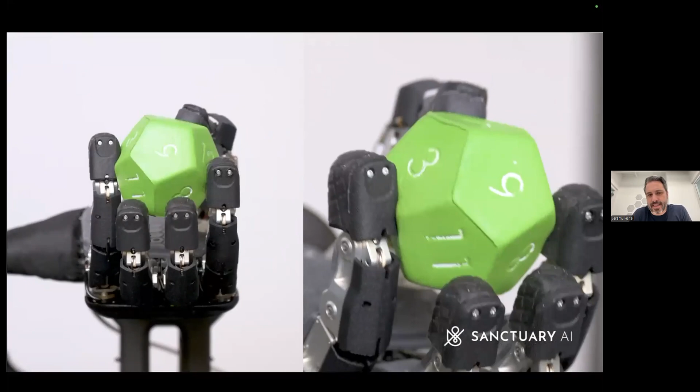We can. Okay, so at Sanctuary, we've been continuing a lot of that thread, driving durable tactile sensors and really studying the relationship between system capabilities and how those systems perform, advancing dexterity in those directions. So I have a few videos to share. This is our hand, our third generation hand. Very anthropomorphic design, very human-like kinematics, and it has the right kind of power density that's similar to the human hand.

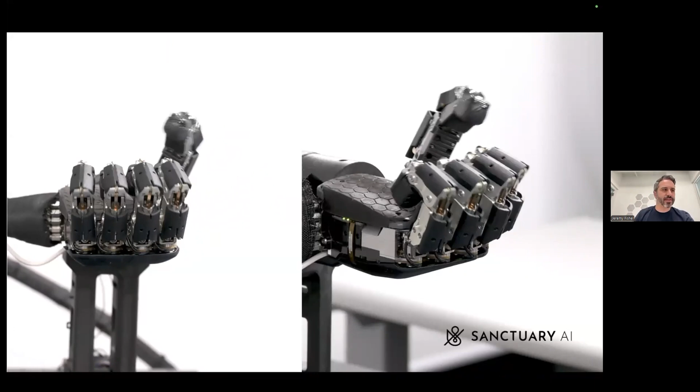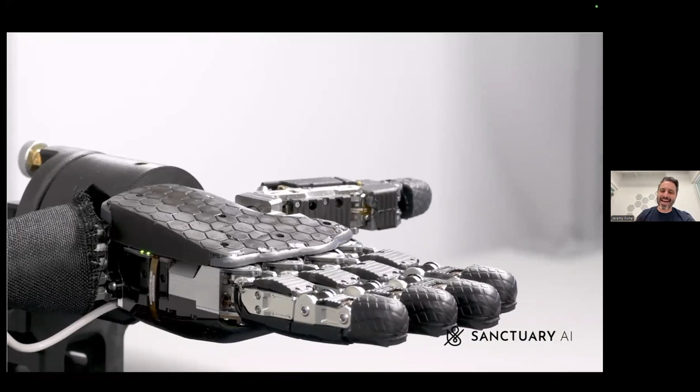Very important for in-hand manipulation, as we're demonstrating here, that some of our engineers have worked on. It can do a lot of things the human hand can do. This has been a critical tool for us to study this relationship between which of these features, degrees of freedom, speeds, and strength actually relate to performing tasks that humans do with their hands. That's really a big philosophy of our company: we want to be able to do the kinds of work people can do with their hands. So lots of great stuff we can share about that.

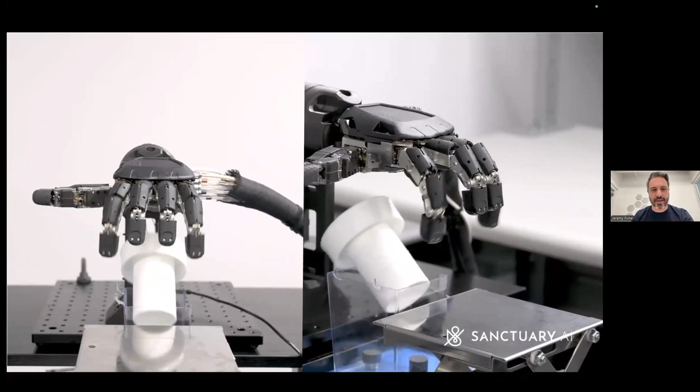One of the ones I actually think is very exciting work we've done lately, and I'm glad I get to talk over this video, is this one we've demonstrated with this in-hand manipulation type task. We train this in simulation, and we're doing this rotation.

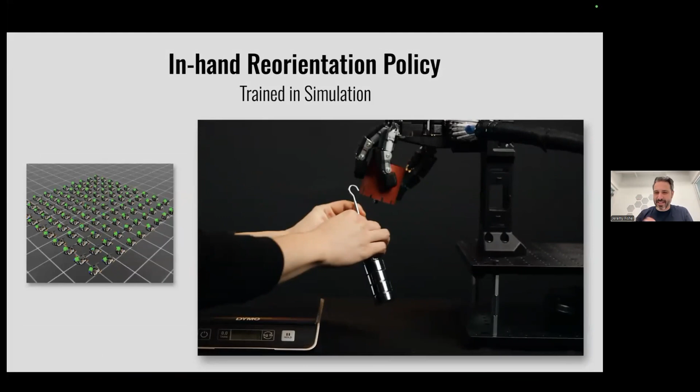We do this with actually 500 grams of weight. It doesn't sound like a lot. I remember seeing this the first time and saying, well, that's just 500 grams, that's not too difficult. But if you have access to weights, I'd encourage you to pick up a 500-gram weight and try to do this task. It's actually incredibly difficult, and I'm really proud of this performance. I can barely do it with 1 kilogram of weight, and at 2 kilograms it's virtually impossible.

So we're really focusing on not only how can we be dexterous, but how do we have the power of the human hand. We'll talk more about that later, but there's really a ton of conflicts in having many degrees of freedom and delicate manipulation and the power, which is something the human hand does an amazing job of.

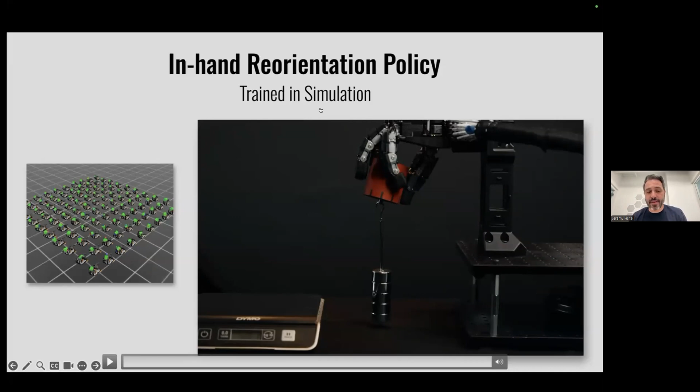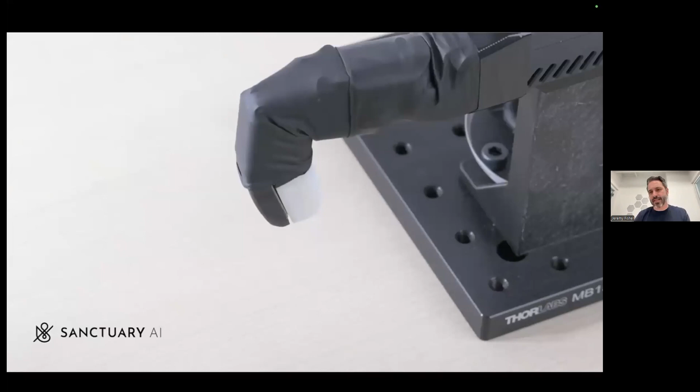Another thing, given my background, that we've focused on a lot is tactile sensing. I made the BioTac at Syntouch, which is a very biomimetic sensor. Most of the group's probably seen the green fingertip on various robot systems. While that system is very capable and can sense the force, vibrations, and temperatures that human skin can detect, it wasn't very durable. Recognizing there's been a number of amazing sensors developed, but they haven't been commercialized or industrialized in any significant capacity, we've really focused on the durability and compliance of these systems while still maintaining that delicacy.

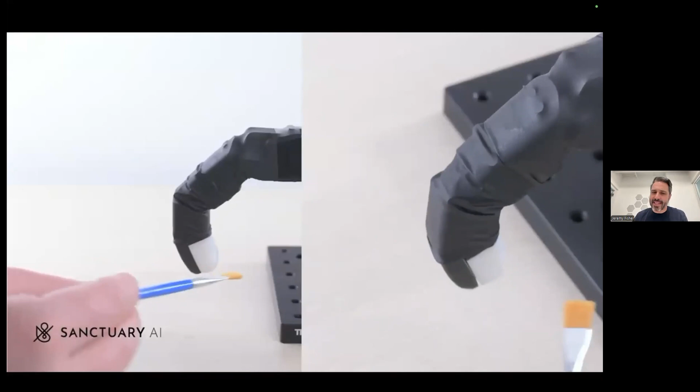So you can see we're able to delicately touch a domino, not knock it over. Another task that's very difficult to do - if you close your eyes and try to touch a domino and not knock it over. We have that sensitivity that allows responsiveness too. This is one of our prototype fingers that's going to come out in a future generation hand.

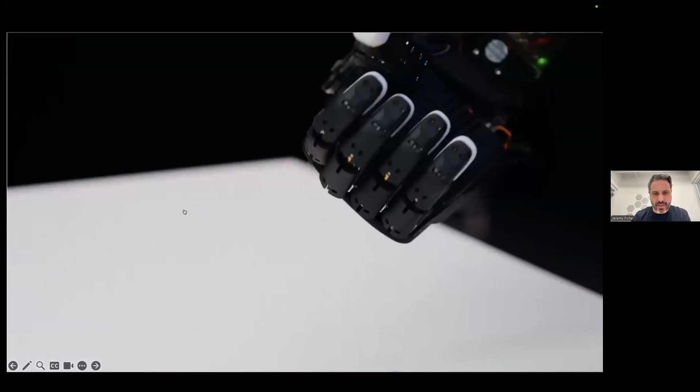We've got lots of great videos on touch. Let me kind of let some stuff play in the background. As I mentioned earlier, our focus really has been on this durability, the compliance, and the sensitivity.

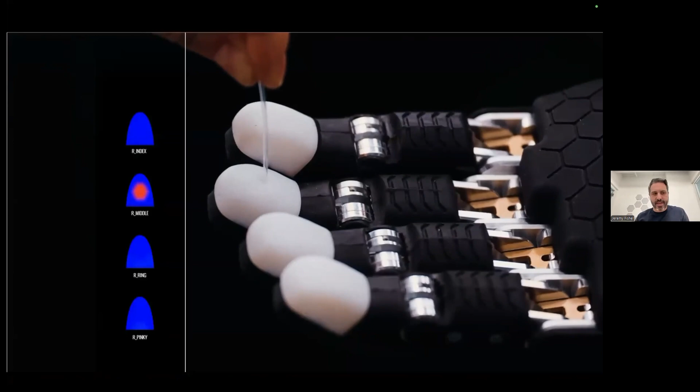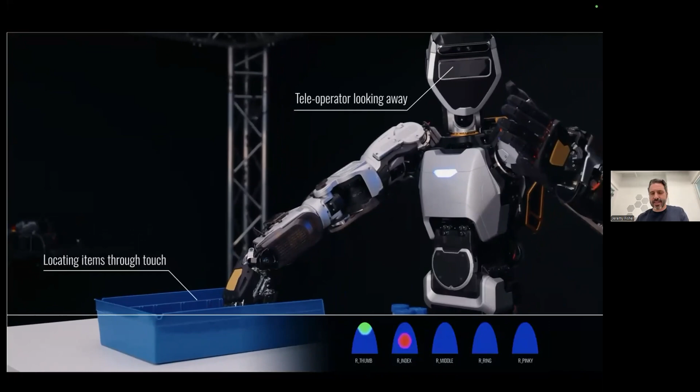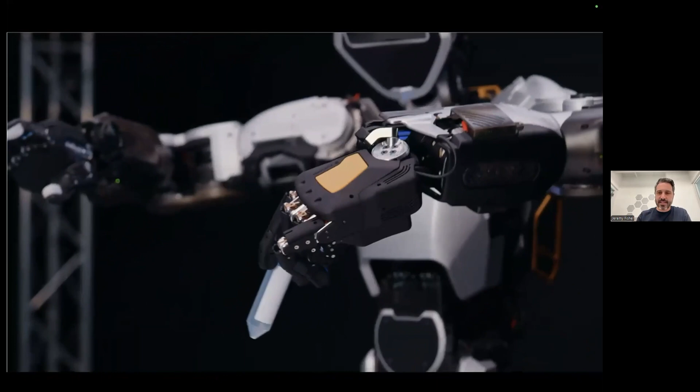Touch is a very, very critical sense for being able to react to what we're interacting with. I've always thought of vision as a planning sense - you see everything in your environment and decide what you want to do with it - but touch is for adapting to those uncertainties. Is the object slipping? Do I need to change my grip? Can I confirm my grip and move on to the next thing? Or how is in-hand manipulation proceeding? So really what we're seeing is touch is very critical for speeding things up. If you don't have this tactile sense, you make a plan, and if something goes wrong, you have to stop and make a new plan. Whereas with a sense of touch, you could react and adapt on the fly the way people do.

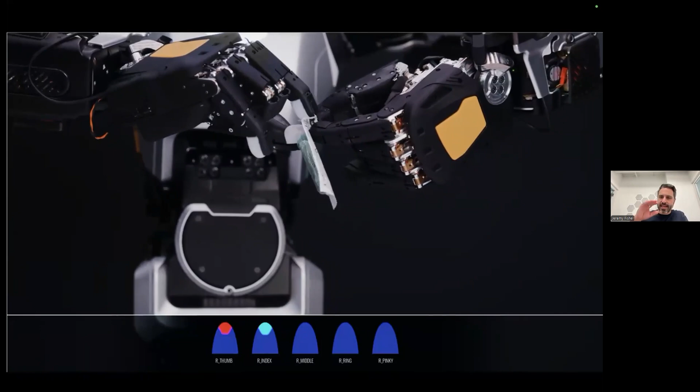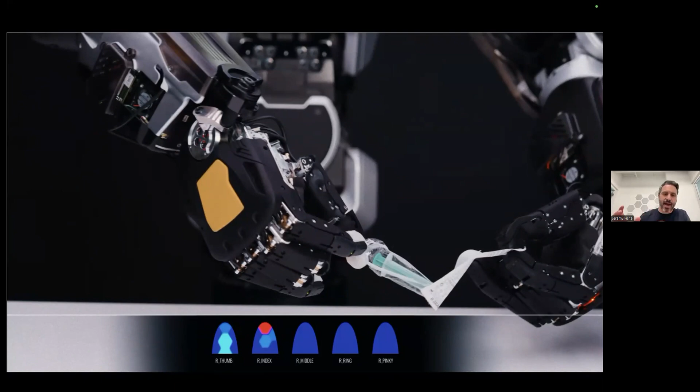Really our focus at Sanctuary is there's this tremendous range we see in human hands, between being delicate and able to do small things, to powerful - like the high grasp force we can attain with our hand. Getting that in one package is an incredibly difficult challenge. That's been our focus: we want to have the delicate tactile sensing, react to small events, yet have a lot of power behind it too. We'll talk more about that, but we've got our hydraulic actuation that gives our high degree of freedom hands the power that gets much closer to human hands while maintaining that delicacy.

And this is my favorite video. We've been putting tactile sensors on robots and doing teleoperation for almost 6 years now, and we're always seeing this immersive connection with touch. This is a reaction from one of our engineers flying the robot - the first time we put the sensors on the robot. She's experiencing them for the first time. I hope the audio plays.

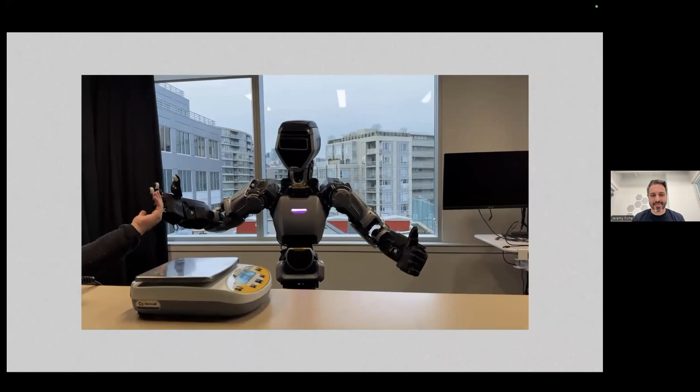Oh, I have touch sensors. Yeah, are they working right now? I can't tell. Oh, yes, they are.

That's crazy. And we see these reactions all the time. It gives this sense of connection. It makes these robots more intuitive to control and manipulate objects, and it's such a critical sense. We're really excited to be working with a company that shares our vision here - we need touch, we need power, we need these kinematics to replicate all these amazing things our hands can do.

Thank you, Jeremy. Really fascinating work.

Alberto, Boston Dynamics is well known for its videos of tremendously agile and gymnastic robots, but people are perhaps less familiar with its work on manipulation. Could you bring our audience up to speed on what manipulation work you and your team are doing for the Atlas project?

Oh yeah, happy to do it. Thanks for the invitation. It's great to be here, and I have to say, just personally, it's also great to be talking with a different banner on my bag, Boston Dynamics. It's been a nice transition from the work that I was doing a couple of years ago. So let me load up my slides.

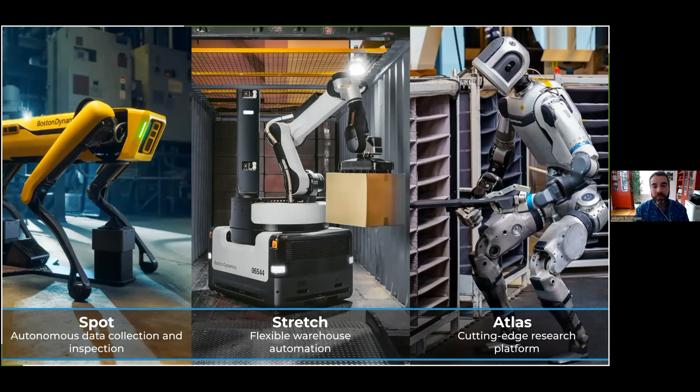All right, just a quick one-slide background of Boston Dynamics. There are basically 3 projects that dominate most of what Boston Dynamics does. Spot, which is a product that you can buy, mostly focused on autonomous data collection and asset inspection. You can think of Spot as a robot that walks around, let's say a factory, or other environments, recording what's happening and sending warning signals when something looks off.

Then Stretch is also a product you can buy, and it's a robot focused on case handling. Today, it's mostly focused on the deployments we're doing on truck unloading, but extending the range of types of workflows it can handle. And then there's Atlas, which is what I'm going to discuss more today, our frontier research project, looking in the past mostly at mobility, and for the last 2-3 years transitioning into mobile manipulation.

Before going into more detail on the type of research that Atlas is doing in dexterity, I just wanted to have one slide as to why dexterous manipulation matters, with one case example of mobile manipulation in manufacturing.

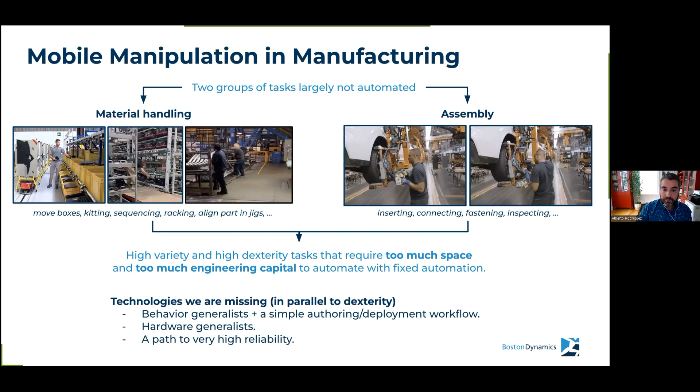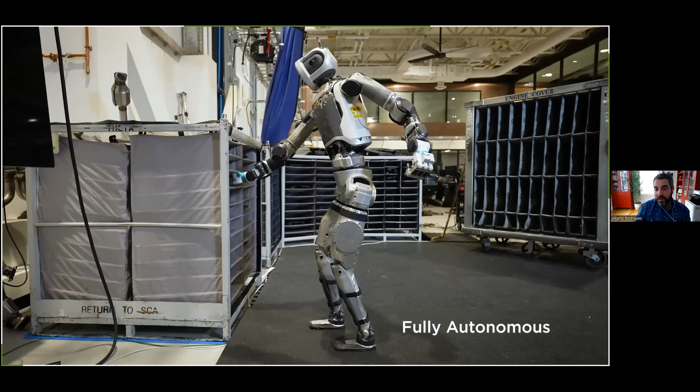So what is Boston Dynamics doing in this space? Here I just put a video which you might have seen on YouTube. This is Atlas executing one particular workflow for material handling. This is called sequencing. There are these input fixtures with different varieties of parts, this one being an engine cover, and this is a fixture where it's inserting it, where each slot gets associated with a car in the assembly line in order.

So this workflow is responsible for making sure that the order in which the parts are inserted in the output fixture that will be rolled into the assembly line is exactly the same as the cars that are going to be assembled in order.

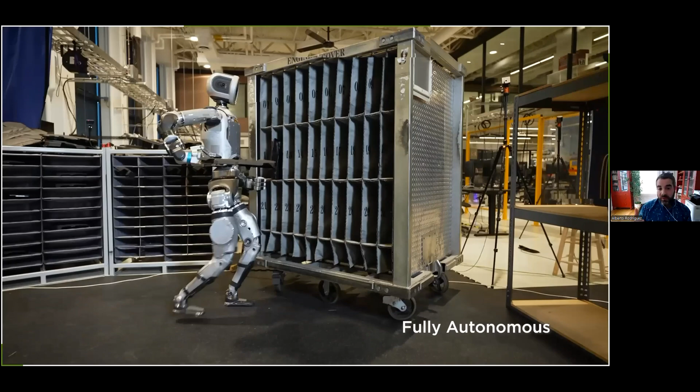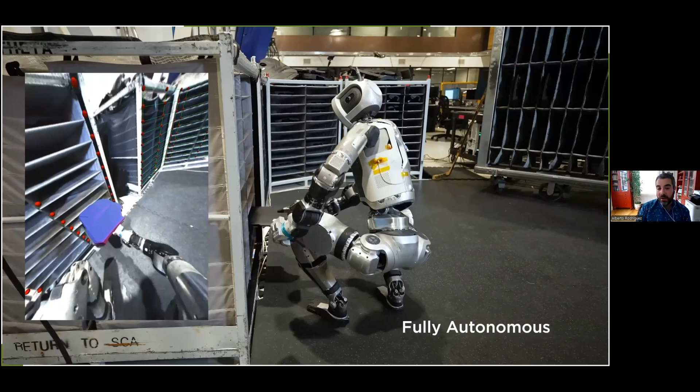So we've been building behavior architecture that is capable of executing tasks like this, pick and place behaviors with a certain degree of reliability. But really what I wanted to discuss today is where we're going next, where we think the next push is to increase the generality of the behaviors that Atlas can do, in particular in the space of dexterity.

For the most part, there are three main threads we're pushing on: simulation at scale for reinforcement learning, whole body teleoperation for imitation learning, and grippers with tactile sensing. I'll go into just one slide for each of these.

On the gripper side, to follow up from Jeremy's presentation, we've taken a slightly different approach. Instead of starting from a humanoid form factor, we've been interested in growing incrementally the degree of dexterity of the gripper as we recognize that we need more dexterity, while at the same time trying to maintain a certain degree of reliability and strength to support the kinds of tasks we want Atlas to do with high loads, heavy objects, and with high repetition, for example data collection at scale.

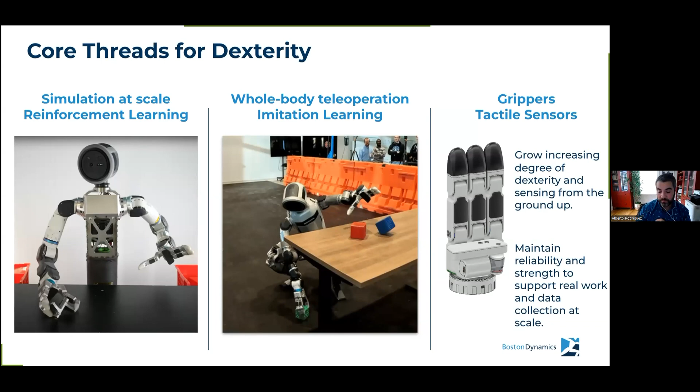Here's one slide on the work we're doing on reinforcement learning. This is a demonstration of a policy trained in simulation that shows a significant degree of generalization to grasping objects. None of these objects showing up in front of Atlas were part of training. It's been trained on hundreds of objects, but none of these were part of the training. It operates directly from RGB stereo, so there's no prior knowledge of the geometry, appearance, or mass of these objects. It all comes directly from either visual or proprioceptive feedback.

One of the things I am particularly excited about is that through training these policies at scale, we do see the beginning of emergence of continuous dynamic behaviors that do not separate between pre-grasp, grasp, and lift. Things like failure detection and retry are emerging when you push these at scale.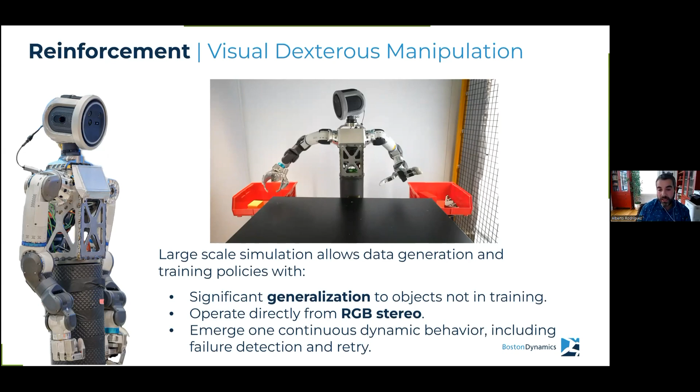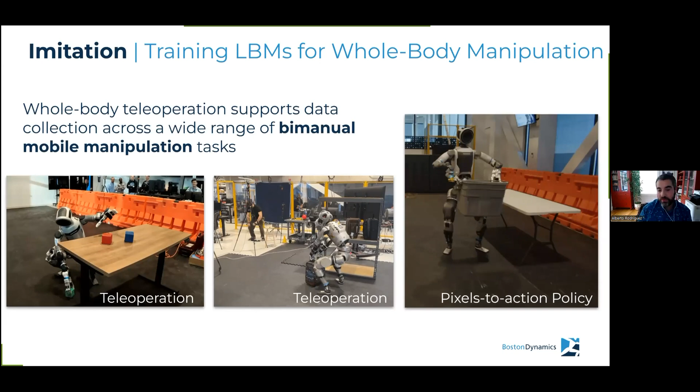So that's one core thread. The second, which we think is essential to make progress on dexterity, not just at the hand level but at the whole body level, is enabling whole body teleoperation that supports data collection across a wide range of bimanual mobile manipulation tasks, including things like crouching to pick up something from the ground, or lifting something heavy using both hands at the same time to do regrasps. Here I show two examples on the left of using a teleoperation system, and on the right an example of a policy trained from data collected from the teleoperation system.

All right, I think that's my last slide.

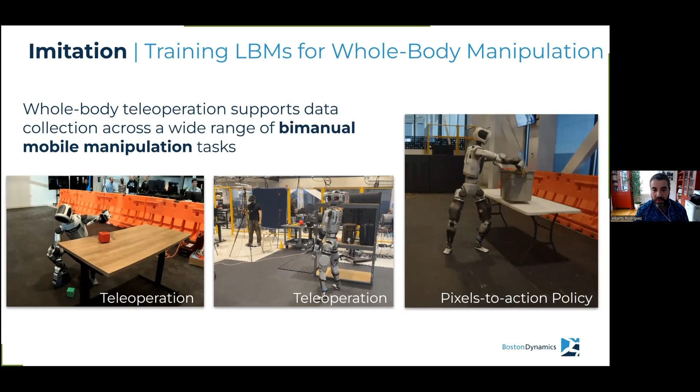Thank you, Alberto, for sharing that really exciting vision for the Atlas platform.

Luis, Apptronik has been in the news for its recent success in raising over $350 million, and more broadly there have been enormous investments in humanoids in recent years. We would love to hear more about your work within this space.

Thank you, Brenna. Thank you, Kevin. Pleasure to be here with esteemed colleagues. Indeed, Apptronik has been a story of success and good timing. I'm very pleased to be here with other colleagues who are equally, if not more, successful, all of us pushing this wonderful market forward.

So, if you don't mind, I'll share some slides. You might know me for having spent the last about 25 years in the area of whole body control of humanoid robots, both as an academic and as original co-founder of Apptronik, where now I am somewhere between business development, fundraiser, and innovation advisor.

The company started in 2016. It started selling components—that was our vision at the beginning, but clearly margins were low. About 4 or 5 years later, we decided that systems, in particular humanoids, as strange as it sounded at the time, was going to be our market.

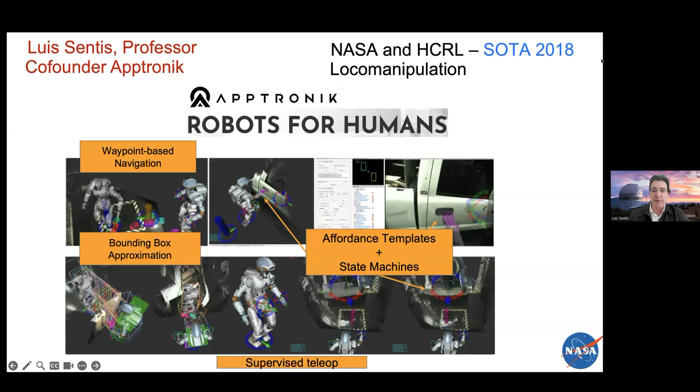What we see here is movies and renderings pre-COVID, about 2017, 2018. They are highly scripted, nonetheless pretty impressive, using affordances. There's not a whole lot of autonomy except maybe some of the walking, semi-autonomous. But that was already a feat.

One important thing to notice here is that out of 33 runs of this task, it was opening a door of a car, finding a bag and zipping it—no, it was not unzipping it, it was putting it in a containment vessel in case they had a bomb, and so on and so forth. We had 33 runs, about 30 minutes each, and we were successful in about 57% of them, which is fairly low.

The rest of them were failures due to falling and unrecoverable walking situations. You can get into state estimation drift and so on. So failure rates, again in 2017, 2018, were high. I'm going to argue that they're still high today.

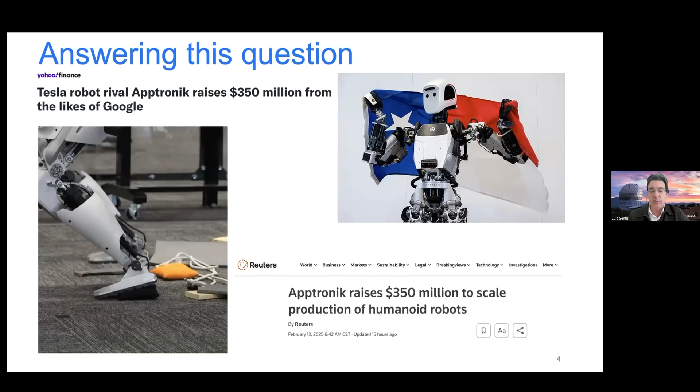Companies like Apptronik and others are here to respond to these issues and turn this into a product, meaning we can operate with way more reliability. A lot of the product and engineering is put now on testing, verifying, deploying, robustifying the algorithms of all sorts, whether it's machine learning algorithms or optimization-based algorithms. I believe that's going to make things much more successful.

Why is there excitement? Although they have limited manipulation capabilities, even tote manipulation—totes are the kind of things you see here on the right, bottom right side—those are huge. Box manipulation is huge. We see a lot of successful unicorn companies, not only on the humanoid side, but also on the industrial arm side, companies like Contoro, Dexterity, Covariant, and so on.

Where manipulation really takes real shape is seeing the demographics, and seeing that we're going to have about 1 billion people age 80 plus with mobility problems. That makes home really, really appealing, and at home is where we see multi-finger manipulation really thriving.

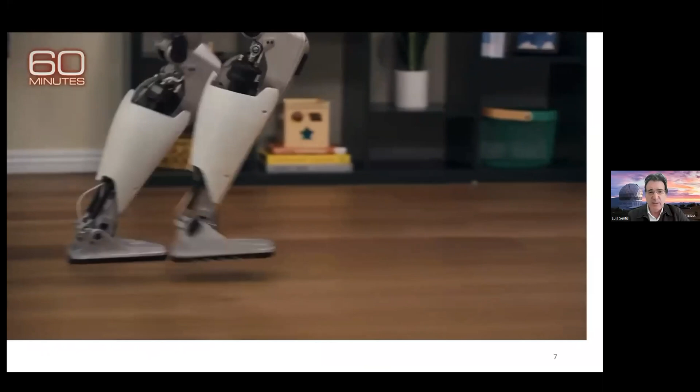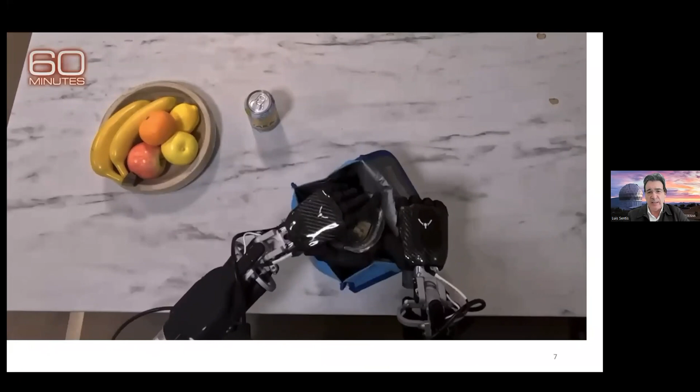This is a recent video on 60 Minutes with Demis Hassabis and our partnership with Google DeepMind. You can see that focus and that idea of achieving multi-finger manipulation as a frontier in humanoid robotics.

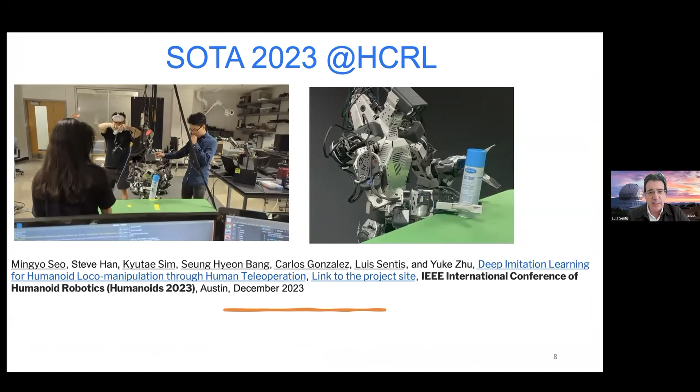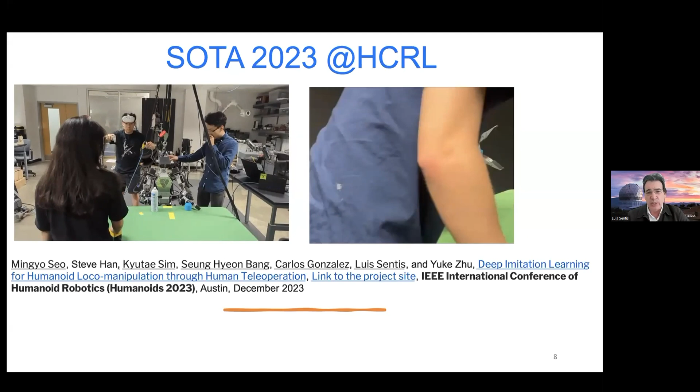Going through the time history, and I'm now switching a bit more to my academic role—this is research we conducted with Yuke Zhu, who's now leading the GR00T project at NVIDIA, using supervised learning, imitation learning, with any sort of interfaces, and being able to achieve pretty successful multi-arm, dual-arm manipulation, long horizon or mid-horizon kind of tasks.

That was achieved by a combination of approaches—often supervised learning or reinforcement learning is criticized for the lack of generality. They have robustness, but not generality.

In this case, we create abstractions. They are not necessarily aware of the entire embodiment. So we have on the left side a supervised learning approach, and on the right side a more classical optimization, whole body control approach. By combining both of them, we achieve robustness and cross-embodiment learning.

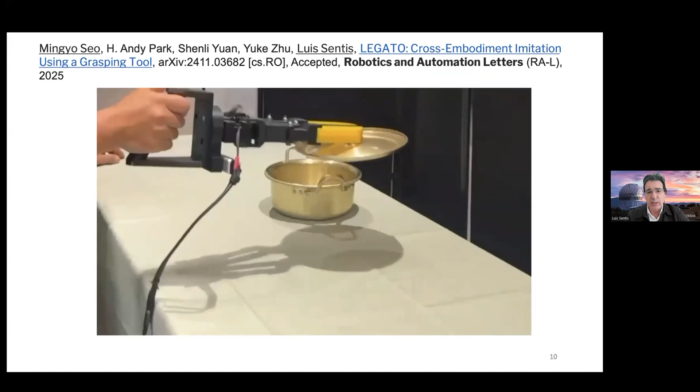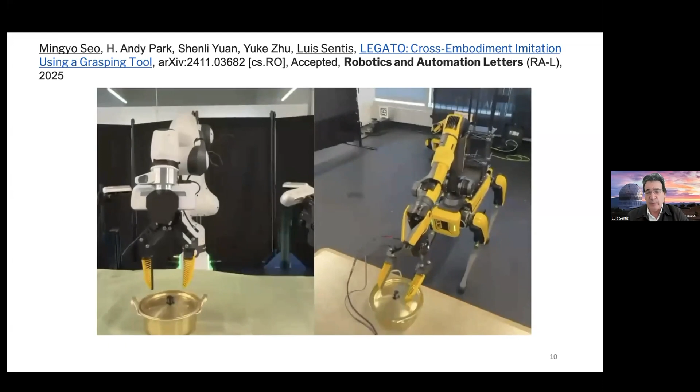Here is our extension using some simple tools that are becoming more popular—3D printing, low cost. We actually open sourced it. There was a collaboration with the Boston Dynamics AI Institute, and we gathered data sets in a representation space that can be translated to different embodiments. So you take out the parallel gripper, and with a few demonstrations, you've passed on the skill to other robotic systems.

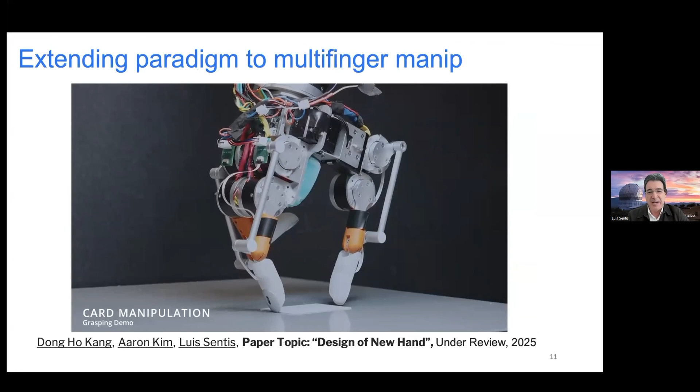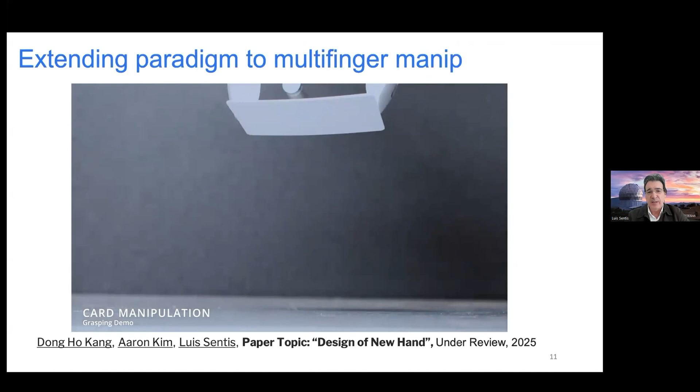This is our latest work with clients I cannot mention, exploring fingernails. We have a high belief that fingernails are going to play an important role in tasks like cooking, managing office work, processing things that are a bit more exotic. We're really excited about the combination of soft and hard surfaces for manipulation. You will see more of that fairly soon.

That allows us to cover more of the grasping taxonomy and the fine precision in manipulation of other types of objects. So we're making a case here for multi-fingers.

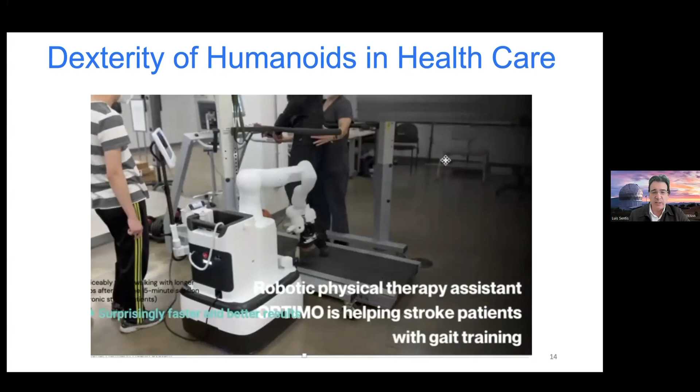In this case, we've been exploring the use of these multi-finger arms. They have quite a bit of force control, tactile control, and series elastic actuation. They have cameras, and also speech recognition and speakers. So you can talk to it and ground the movements, the dexterous movements, into words.

Well, safety is another story. We're partnering with another corporation called MITRE for safety. But that's pretty much it. Thank you very much.

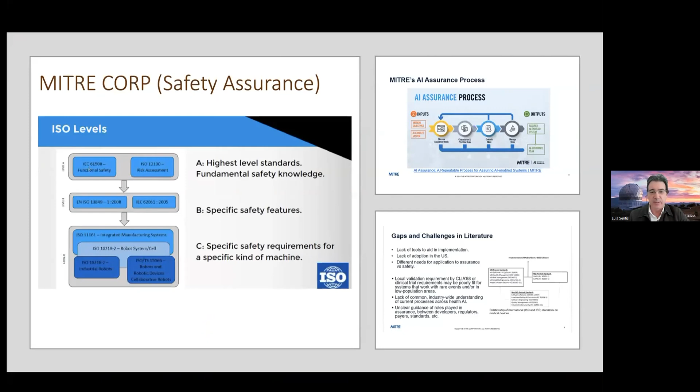Thank you, Luis. Very impressive trajectory. So, Luis, perhaps you can get us kicked off with the first question: what are some near-term or long-term applications for humanoid manipulation that you expect will have groundbreaking impact?

Well, I think I still believe that the killer app continues being this millennial problem that from the Chinese to the Turks to the Jewish communities have dreamed of the multi-purpose robot at home. So sometimes people argue that humanoids is a solution in search of a problem. I want to say that no, it's a problem in search of a solution.

We all want to have the killer app of at-home robots, and we're seeing a clear move by the Metas and the Google DeepMinds in that direction. The reason we're seeing the industrial, logistics, retail humanoid nowadays is because it's easier to make B2B kind of business development, and then penetrating the home markets is a little bit more difficult.

Morgan Stanley has a study showing the whole human labor market is several dozens of trillions of dollars, and the pieces of it that humanoids can take are on the order of several trillions of dollars. We're going to be driven by this dream and our ability, in particular in the next 18 months. In 18 months, we're going to know everything about the future of humankind with humanoids. I joke around, but we don't have to wait too long to know whether we're going to make it in those applications.